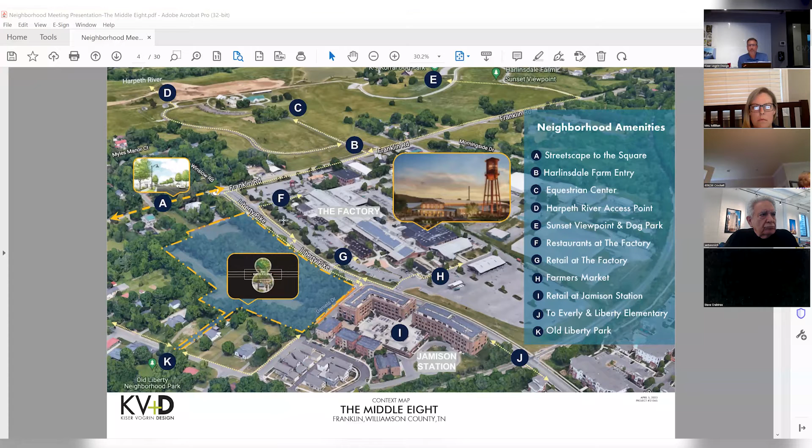I want to talk a little bit about the site itself. This shows the aerial photograph of what it is today, 7.2 acres. Before we went to this PD rezoning effort, we subdivided the Truett home, which is the home of our clients, the Truland Development, the factory across the street. This shows the largest internal tracts in the city of Franklin. What I want to focus on here is Franklin Road to the left, Myles Manor to the left, Liberty Pike, Daniels Drive, Old Liberty Pike.

As most of you know, the site slopes from Liberty Pike down to Old Liberty Pike. The drainage is just uninhibited, basically draining from Liberty down to Old Liberty. Our intent is to capture that stormwater and work in terms of drainage and stormwater to help whatever existing condition issues may be on the site. So that's part of our project design, working with the city of Franklin. Just want to bring that to your attention.

The yellow line depicts this property in its entirety. We are proposing a 75-foot naturalistic buffer adjacent to the national registered property, the Alpheus Truett House, that is required per historic zoning.

As I mentioned, I want to talk a little bit about land use policy. This property is currently zoned R4. The intent is to rezone this to planned development, a PD district.

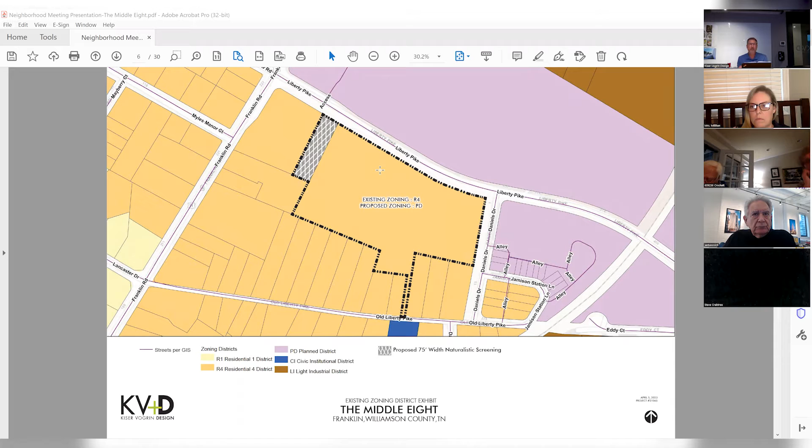We actually met with the Historic Zoning Commission, had a couple of DRC meetings with them, walked through the process. We received approval by them for a preliminary certificate of appropriateness. And now that gives us the advancement to move forward with this PD rezoning plan.

So we'll be going to them after this as well. It's not just one stop and done. We will go back to them to ask about additional details for the architecture as we get past this stage.

Also talking land use, big picture. Envision Franklin is the guiding document for the city of Franklin, and it allocates various districts in the city where certain products and project types occur, land use policy. This is taken from the actual city of Franklin GIS, Envision Franklin design concepts, and our site is located in the orange, which is multifamily. That is what the city is proposing for this site to be within Envision Franklin.

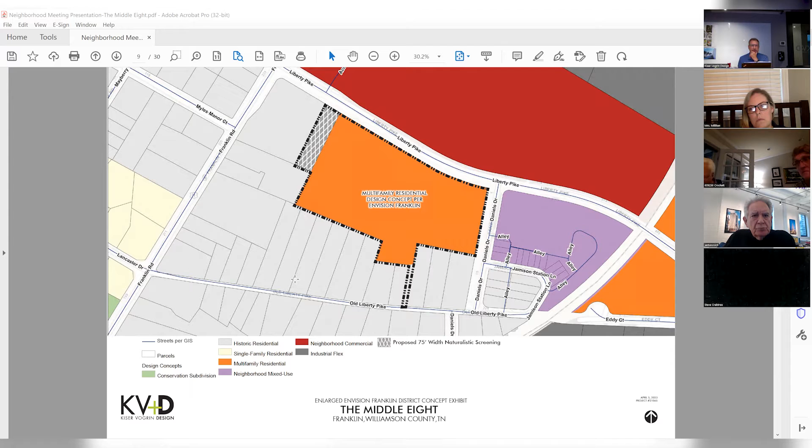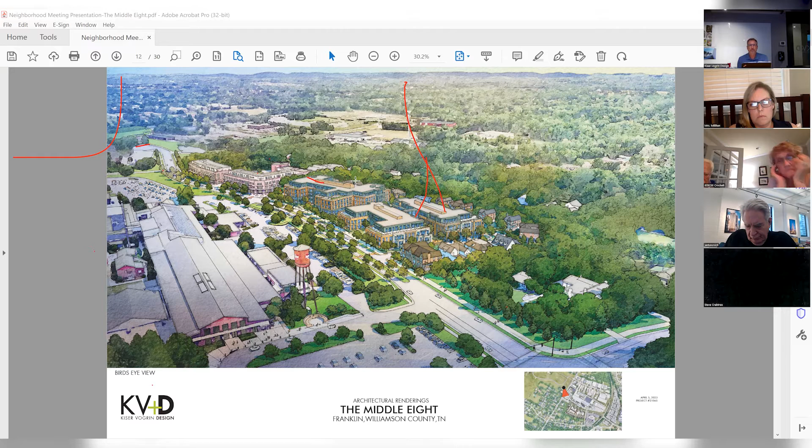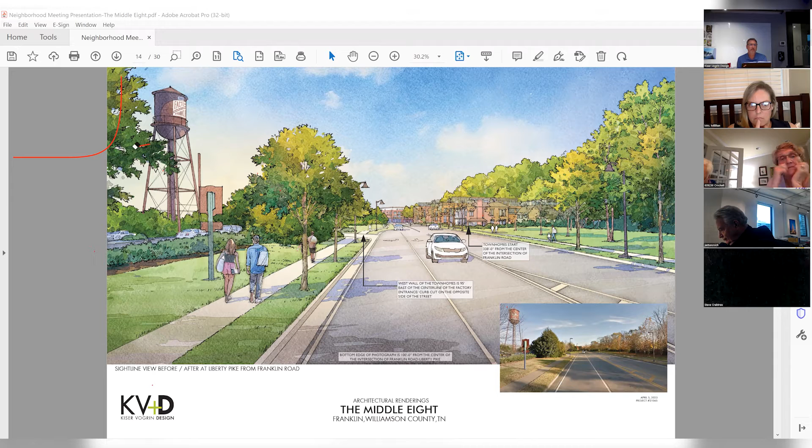I wanted to show a perspective that was requested by historic zoning, to show what it really looks like from Franklin Road as you're standing there or walking down Liberty Pike. So we're standing about 100 feet from Franklin Road at eye level, looking at the middle eight.

So the view shed here from Franklin Road looking towards the proposed middle eight—this first bank of townhomes on the master plan, with Franklin Factory to the left. This first bank of townhomes is about 338 feet from Franklin Road. The Truett House is to the right, and you can see Jamison Station at the terminus, which is the focal point of the street as it bends towards the railroad tracks. This tries to show the transition of building height to Jamison Station and what you see from Franklin Road.

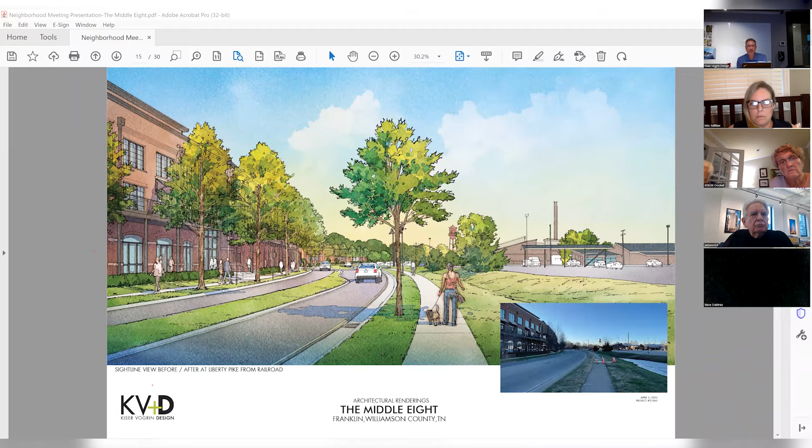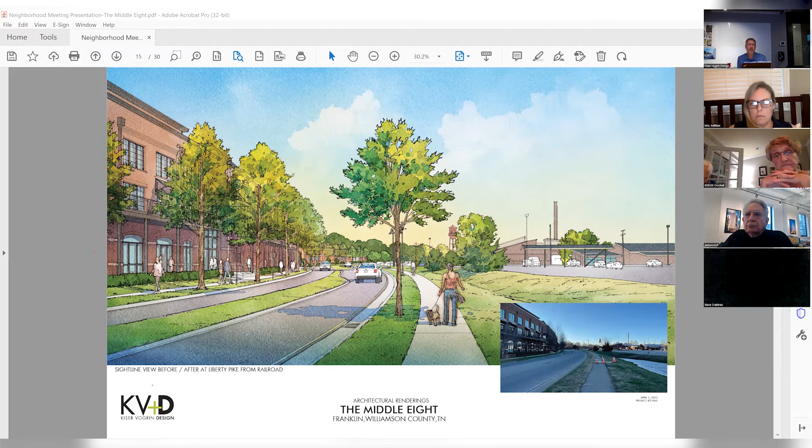One of the things we're also discussing with the alderman and the city of Franklin staff and engineering is how we can beautify or amplify Liberty Pike to make it a more pedestrian-oriented, walkable street. This is our vision of what Liberty Pike could be—we'd like to add a median, street trees, and better walkability. As you know, it's a thoroughfare with traffic; we'd like to calm it down and make it pedestrian-oriented toward the factory, providing walkability both from the middle eight to the factory itself. So we're working with the staff, the alderman, and the team on what Liberty Pike could be as part of the bigger district of the property and how it could interfold within the region.

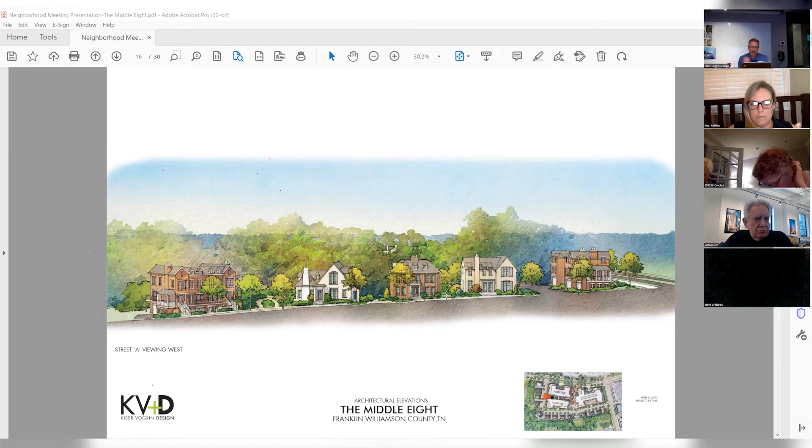Going into some other images that were provided for historic zoning and land use plan amendment, this is the elevation on Liberty Pike, standing on Liberty Pike. This would be the first bank of townhomes, 3 of them here to the right that are 2-story in nature. Then you see the first bank of multifamily, which is 2 stories plus 1 recessed, as I talked about, and then it starts bending back to Jamison Station in the back.

But again, creating a walkable community that's inviting, welcoming, plays off the interactivity between this project and the buzz of the factory, all the improvements they're doing, the walkability to downtown, the park at Harlinsdale Farm, just engaging the community and creating something very robust and a synergy to the development.

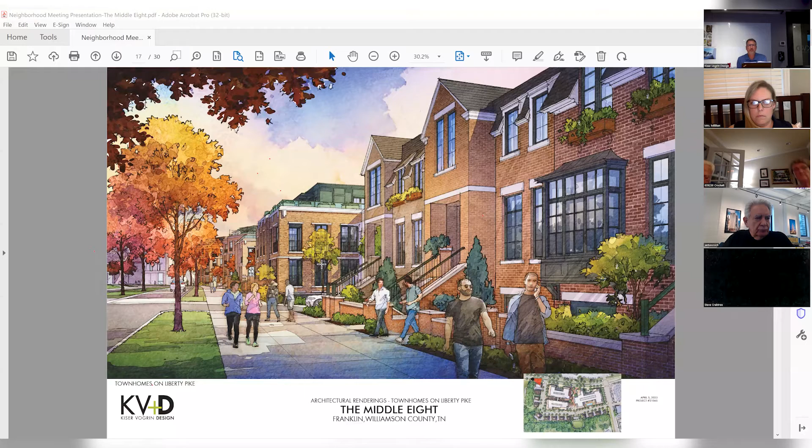This is an elevation showing the new street into the site. The little red arrow on the bottom shows you where you're looking into. This is the proposed street with parallel parking, sidewalks on both sides.

To the left is the multifamily units showing the transition in height, and then to the right are the townhomes, some of the single family, the duplexes, showing what the character of the streetscape could be, the street tree elements, the walkability, the parking, opportunity for guests to park on the street, but creating a very pedestrian oriented street in nature.

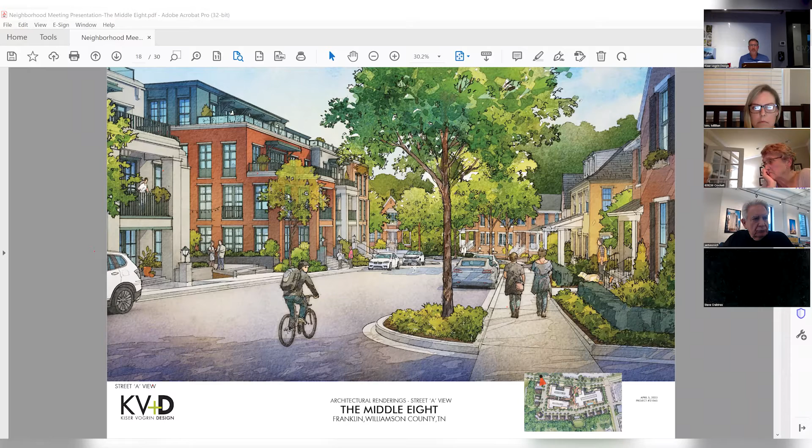As part of building 1, we have a residential mews that is reminiscent of some British design elements, some European design elements that really embrace a block in the building that allows a mews to go between the buildings and residential units to face the building. So it's a very interactive space.

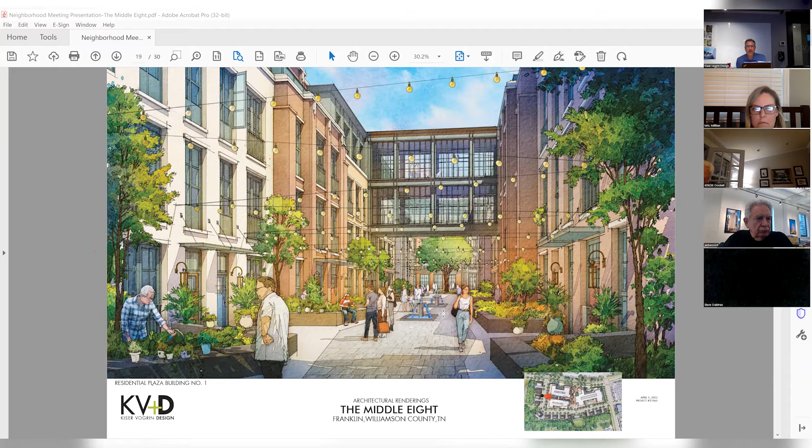It connects the plaza. You have an aerial bridge across that connects the two buildings, which shows the multifamily units engaging this space, creating an outdoor environment, people meeting, gathering space, things of that nature, string lights, just animating the space. But units are all addressing the street, so it's a very unique opportunity that creates another streetscape element as part of the plazas and parks.

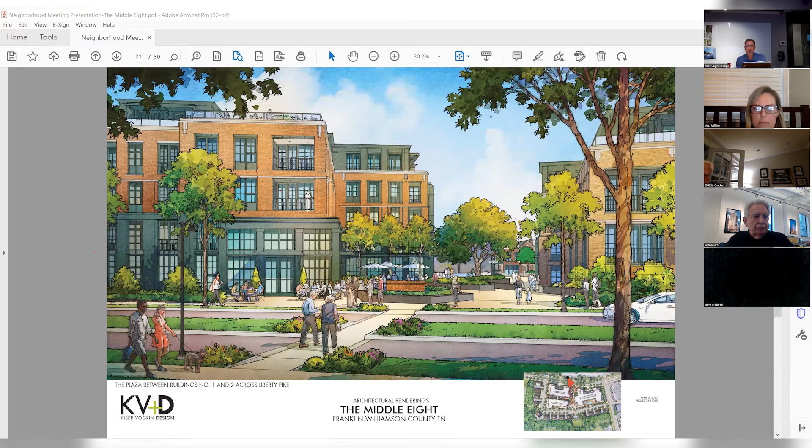Kind of peeling back a little bit, now we're across the street in the same zone, looking on the factory side towards the site, mid-block of the multifamily residential between the buildings. Again, showing the mass, the scale, the character of the building architecture, working with historic zoning in the future as we get into it.

But showcasing the interconnectivity, the walkability, again the idea of what Liberty Pike could be, as opposed to a 3-lane section. We'd like to introduce some type of median if possible, walkability, just make it more pedestrian friendly and safe to walk across Liberty Pike as opposed to what exists today. Working with staff in that element and with the factory and our team.

This is the view shot of the most eastern courtyard adjacent to Jamison Station, really opening up the building. The building ebbs and flows from the street, allowing these pockets of open space to enhance the entrance and welcoming features of the building, with pedestrian courtyards and plazas, creating opportunity to engage with others if you live in the community or are walking to Franklin or to the factory.

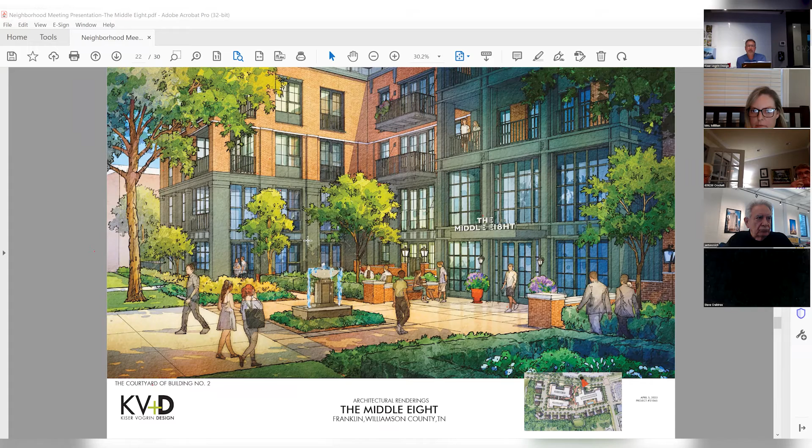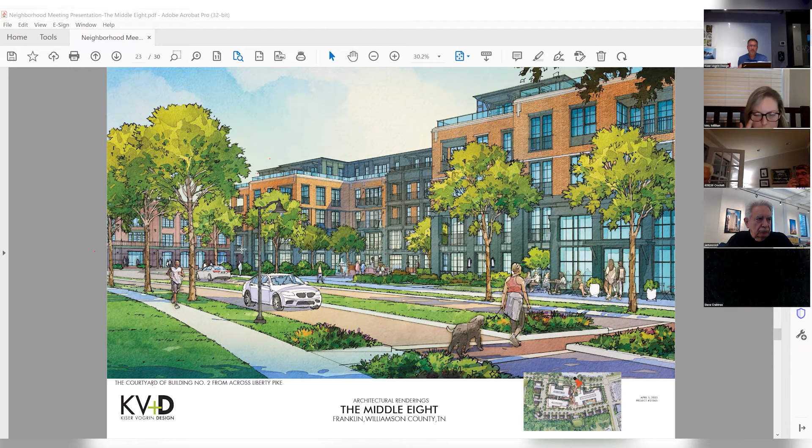Animating the spaces. That same view shot, pulled back now on the factory side, showing what Liberty Pike could be. The elevation of the building, as I mentioned, this is a 4+1, 5-story total building next to Jamison Station, which is on the left, a 4-story building in itself.

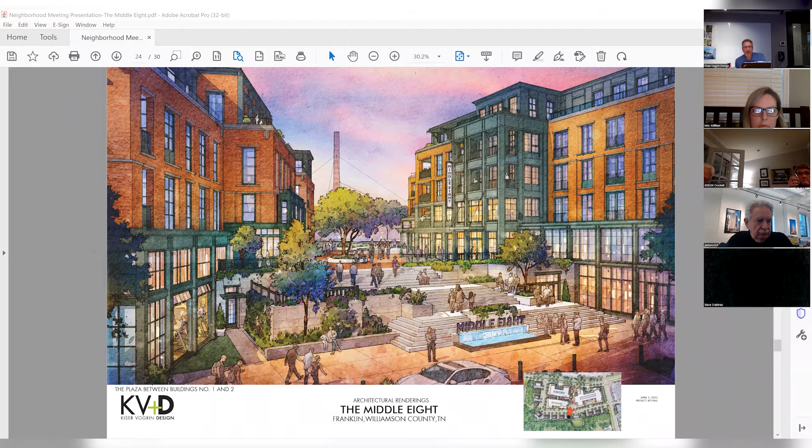Showing the connectivity and walkability we're trying to promote on this project. We call this the Grand Steps, the plaza between buildings 1 and 2. We're standing on the new street proposed, paralleling Old Liberty Pike, which you see through this middle plaza and courtyard. There's so much grade change on the site that this allows us to create this dynamic plaza that slopes down, with interactive steps and fountains. You can see the factory district and the chimneys in the background.

This showcases the opportunities for open space created with parking underground. That's been very important to allow us to move forward with the city of Franklin, the land use plan amendment, and historic zoning—parking underground allows us to provide all this open space as opposed to a parking deck wrap like some other communities. This really showcases the opportunities for amenities, but also the architectural detail that's gone into the design, working with historic zoning and the planning staff of the city of Franklin.

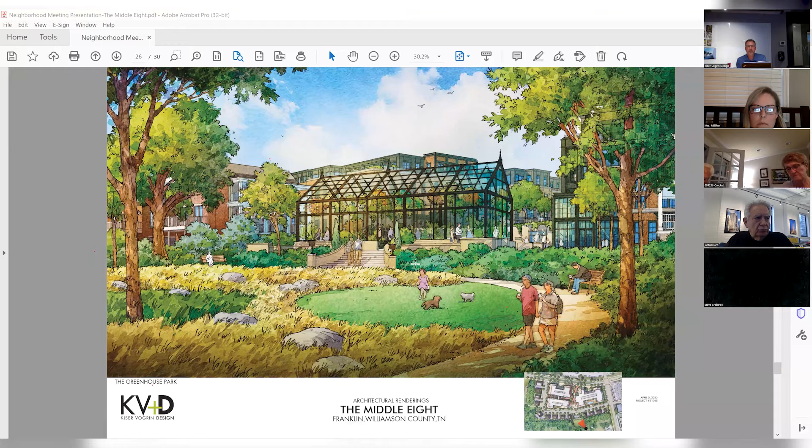As I mentioned earlier, this is that little pocket park, a greenhouse park with a water quality stormwater element. We want it to function for water quality and things of that nature, but also be aesthetic at the same time. This little greenhouse in the middle is a nod to the history of the Truett House and its family, and could be a crucial part of this park, interacting with the buildings adjacent to it.

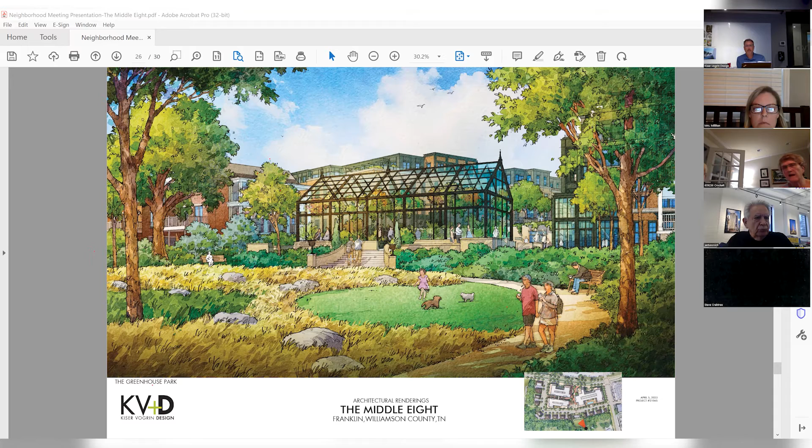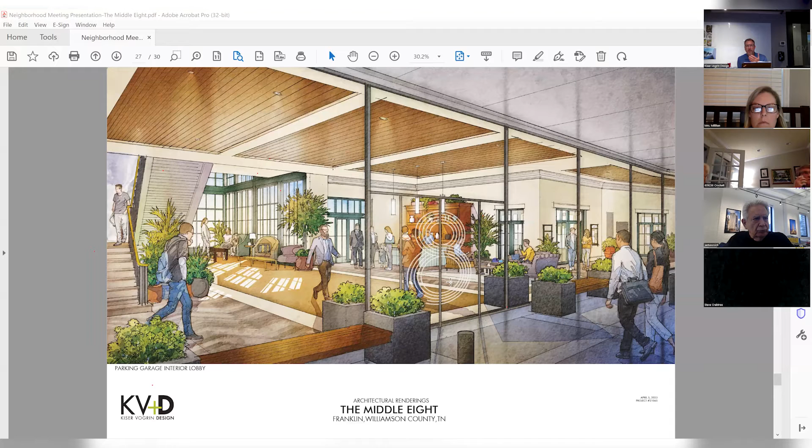This shows the pedestrian lobby below the building, offering pedestrian entries if you're parking underground—what you're getting into, and the welcoming experience up to your unit within the multifamily buildings.

I want to talk a little about next steps we have to go before. We're requesting preliminary development plans to the city of Franklin for rezoning from R4 to PD. We submitted these plans on March 27th and have already gotten comments from the city. We're addressing those and have to resubmit. The development plan and rezoning will be at the Franklin Planning Commission for initial submittal April 10th, so we've got some plans to address based on the city review.

We'll have a joint conceptual workshop on April 27th, before the Mayor and Board of Aldermen and Franklin Planning Commission. Then we're tentatively set for a Franklin Planning Commission meeting on May 25th. If that respectfully gets approval, we move to 3 more readings before Mayor and Board of Aldermen, which will be in August and September.

So there's plenty of meetings to go before we get down the road, but we wanted to give neighbors this opportunity to see the plan, offer input, and ask questions about the community. We've also had several meetings with historic zoning and the land use plan amendment—we've been to the Mayor and Board of Aldermen Planning Commission on some preliminary meetings, giving us the nod to move forward. So this is the next step to give you an opportunity to see what we're doing.

I'm not going to argue to that. I'll let staff step in here if you don't mind, Joey, maybe explain what he's asking. I'm not sure exactly what he's asking, but well, it's zoned historical, so you have to make an argument of why you believe it's not that important in order for you to rezone it, right? So I'm asking, what is that argument that you're making that it doesn't have the importance that the overlay has clearly marked on it already?

Yeah, Gary, let me jump in here really quick. So the historic preservation overlay is for any alterations or new construction within the designated area of the city. So the applicants have already gone before historic zoning for a preliminary recommendation. So they are not requesting to change the historic preservation overlay line. When the word rezoning is mentioned, it's the base zoning district. So there's the base zoning, which they're requesting for planned district, and the historic overlay exists on top of that planned district. So the line for historic preservation is not changing or being altered.

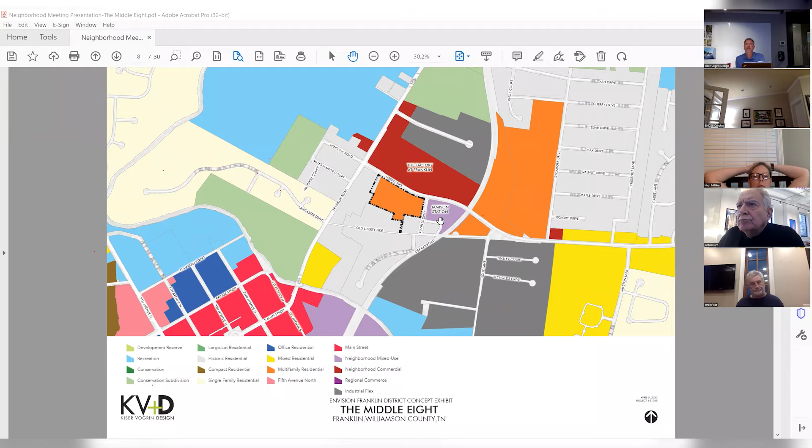Has FEMA provided a recent study on the floodplain in this area? Underground parking is going to greatly impact the capacity of floodwater deterred from Old Liberty Pike residents. We are working with the city of Franklin's current regulations. Again, the 100-year flood is on this little pipe stem - I'll go to the plan here. There is 100-year floodplain right here. As you know, much of Old Liberty Pike is in the 100-year floodplain, so we're studying that diligently. Everything will be above the floodplain - both the garage below the building, all the buildings at grade - everything will be out of the 100-year floodplain. So we're studying FEMA and the floodway maps with the city of Franklin. That's part of our submittal documents, very detailed.

Next question was, what does reduction of parking mean? There's not enough parking for all units - wouldn't that be a parking issue, 2 spots per unit? As part of our traffic impact study, we provided a parking study. We've seen in the city of Franklin that parking demand is very high. We want to make sure this multifamily development has all residents parked adequately, and that there's enough residential parking spaces for every unit. So we're asking for a certain amount of parking spaces per building, specifically for the multifamily. We will all be parked underground, so we want to be efficient about that - everybody has ample opportunity for parking. All the residences on the street, so to speak, internally, will have either driveways or garages within the townhomes, all these perimeter buildings, as well as on-street parking. So it's a combination of both. We will propose a parking reduction to meet the current demand of what's required for this type of multifamily development proposal.

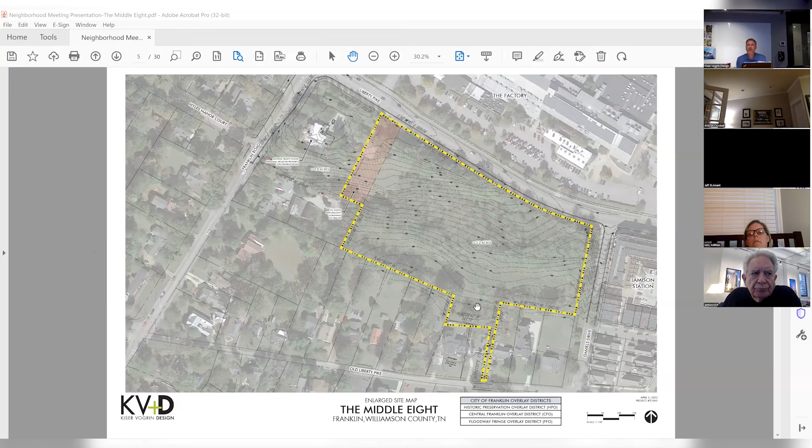Where would all the 200+ dogs go to the bathroom? That's a great question - is the stormwater area a dog park? It is anticipated that a portion of this pocket park in the master plan, this stormwater treatment area here at the low end of the site, we want to incorporate some type of dog park, so you have an opportunity to walk your pet there as well as use pedestrian trails.

You said there was a buffer between the property on Franklin Road because it was historic overlay. Aren't the homes on Old Liberty Pike also? Will there be a buffer there?

Going back to the historic preservation overlay, the green is historic preservation overlay. As you can see, Old Liberty Pike is not in the historic preservation overlay, and half of this site is not either. Obviously Franklin Road, Jamison Station, and the factory are all in the historic overlay district.

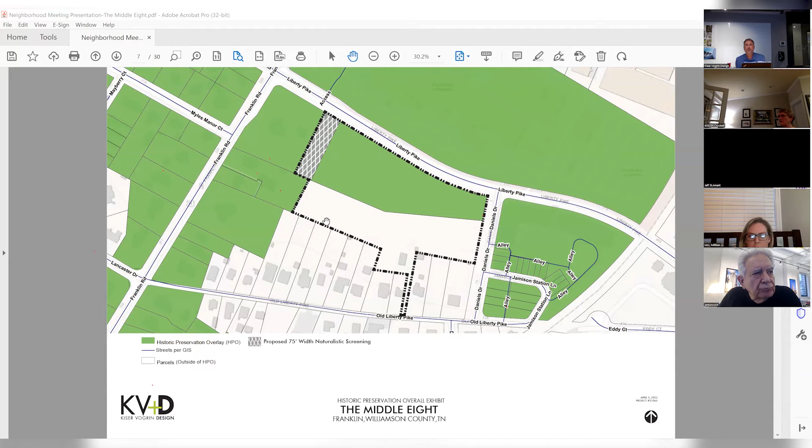We are providing a buffer against the nationally registered historic property, the Truett House, showing separation or green space against the edge of the Old Liberty Pike properties that line the street. That edge along Old Liberty Pike is plus or minus 30 feet, with a landscape buffer and tree preservation. Adjacent, we're 10 to 12 feet with additional supplemental landscape. The intent is to preserve healthy trees and replace others with something better.

To provide screening, transition, and more green in addition to what's there now. Next question: I'm concerned about the floodplain rising for houses on Old Liberty Pike that already have backyards that get flooded. As mentioned, we're studying that in detail, which is required by the city of Franklin for stormwater management and stormwater quality.

Question to the city, I'm not sure if I can answer this, but this is setting a dangerous precedent to the future of Franklin as to preserving its character. If this is allowed, it will be used as a club to beat down any rejection of a development project, laying groundwork that anything zoned historical or residential can be rezoned to maximize profitability of the lot.

Again, we are working with the city aldermen, planning commissioners, and historic zoning to ask for a rezoning and development plan for this project, to allow for a mix of residential product types and diversity of opportunities. The owner and client have the opportunity to make this request, but it is the city's decision to make final. This is what we are asking for and proposing: a rezoning for a multifamily mixed-use residential project.

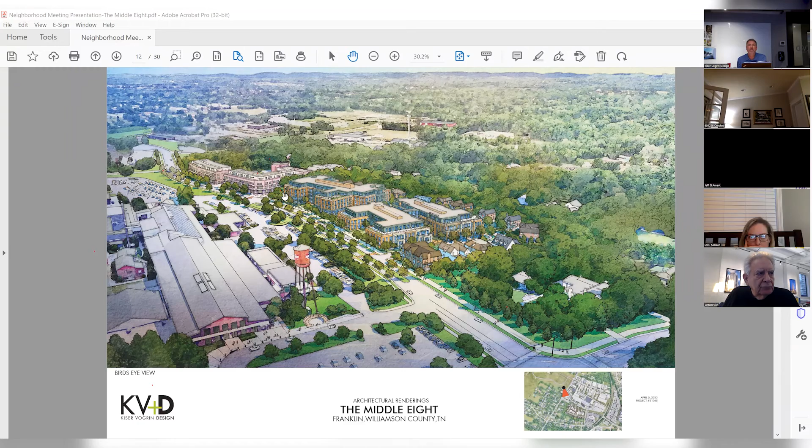Next question: how much further back is it really than Jamison? There are parts that have setbacks, but other parts seem really close to the street. I'll go to the plan here — this shows how close Jamison Station is to the street. We're proposing a 12-foot wide multi-purpose sidewalk, which is encouraged by the city of Franklin, giving it an even broader setback, with a 6-foot planting strip, a 12-foot sidewalk, then the building.

We range in dimension — some of these courtyards are 77 to 80 feet deep. Off the street, we're probably 10 feet off the sidewalk in some locations, maybe 5 in others, but as you can see, it's set back from the street. Given the planting strip, the 12-foot sidewalk, and landscaping in front of the building, compared to Jamison Station which is right on the street — when you look at this facade, it ebbs and flows back and forth, allowing flexibility so the building doesn't have all that mass on the street, creating a better streetscape.

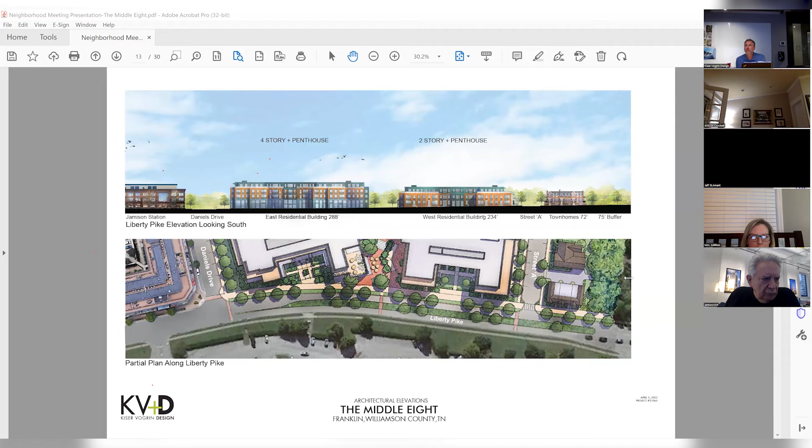What are the proposed prices of the rental condos on Liberty Pike, the duplexes, and single family residential? Also, will those have garages or will they park on the street? For all the multifamily buildings — going to the plan — the parking is underground, as I mentioned, to meet the adequate needs of the parking.

We've talked internally with our team that, being this is 18 to 24 months out potentially from having a finished product, it's difficult to give a true estimate of pricing. If we had studios for rent today, the cost could be $1,300 to $1,400 a month for a 400 square foot unit, but it's all pending on current market rates and what the market demands.

That's kind of in the process as we're working through the project. But really, we want to offer a diverse product type, be it single family home, multifamily residential, duplex, or townhome, to provide that flexibility so there's an opportunity for different product types at different price levels.

That's way too tall to be next to the 2-story factory. We've had discussions at historic zoning about that. They've seen the plans. We built a 3D model of this project as well and shared that with the Planning Commission, historic zoning, that showcases that.